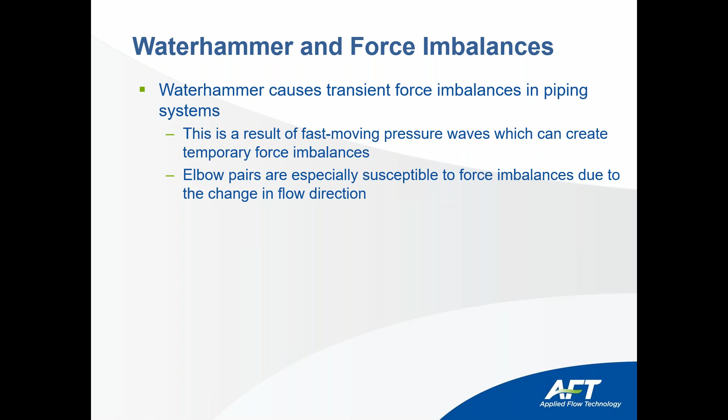Waterhammer is a sufficiently complicated process such that modeling software is usually required. Hand calculations sometimes are not accurate enough, so we require the use of software, and we'll be showing you that in this presentation. Typically, the issue of primary interest to the engineering analyst is understanding the transient pressure extremes, because this allows the selection of pipe strength and design for equipment protection and generally safety mechanisms.

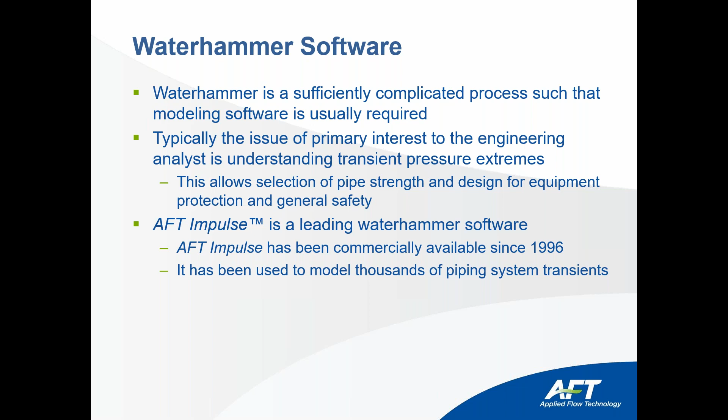So let's start. Once you calculate the overpressure, what should the designer do with this value? Well, the answer to this question depends on the code that you're using. If you're using B31.4, pipeline transportation systems for liquid hydrocarbons and other liquids, B31.4 refers directly to the maximum value of the overpressure, establishing a limit of 10% above the design pressure.

Now, if you're using B31.3, it's a different story because B31.3 doesn't refer directly to a maximum overpressure value. It refers to a stress. So the maximum stress produced by the loads created by the surge pressure shall not exceed 1.33 SH, where SH is the allowable stress for the operating temperature.

So what is the traditional way of calculating the force imbalance? Generally, the force uses only pressures. Here we have a case of two elbows, and we're closing a valve. The flow direction is in this sense. So we're totally closing a valve right here. This generates an overpressure in this section that travels back and sees this first elbow at the beginning, and the other elbow on the other side has a static pressure.

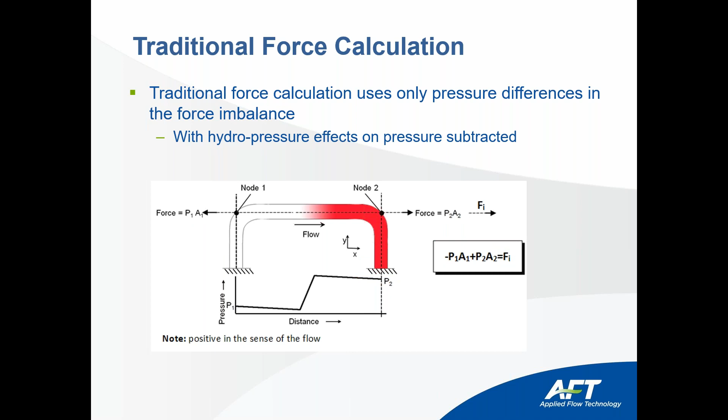This works best when flow stops quickly with no inline components, and the equation used is: the pressure difference is equal to rho times C times delta V, where C is the wave speed, also known as celerity. In most equations it is referred to as A, which is synonymous with C.

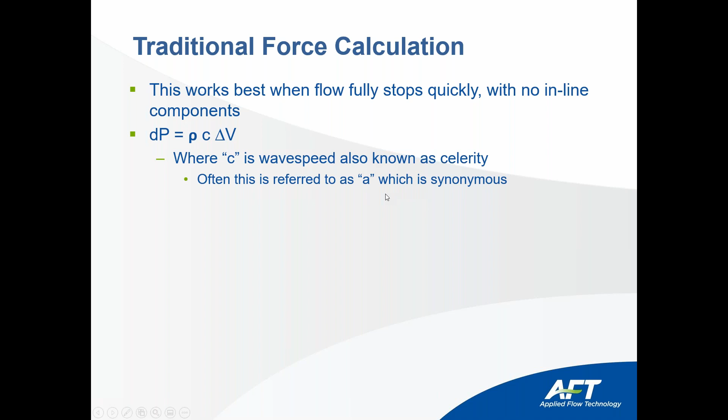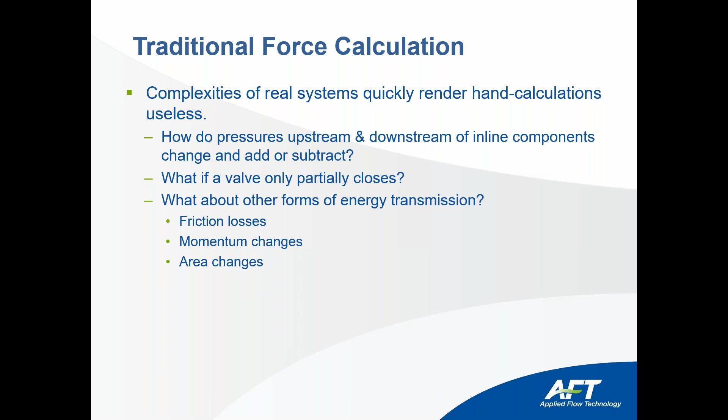Now, the complexity of real systems quickly renders hand calculations useless. How do pressures upstream and downstream of inline components change and add or subtract? What if the valve is only partially closed? What about other forms of energy that are not considered, like friction losses, momentum changes, and area changes?

Let's see an example here that we're going to talk about, and we'll use it as a model to see how we export forces for pipe stress. We have a tank here, tank A, that is transferring fluid to another tank, and we're going to partially close a valve right here. We're going to partially close it 90% in 0.5 seconds.

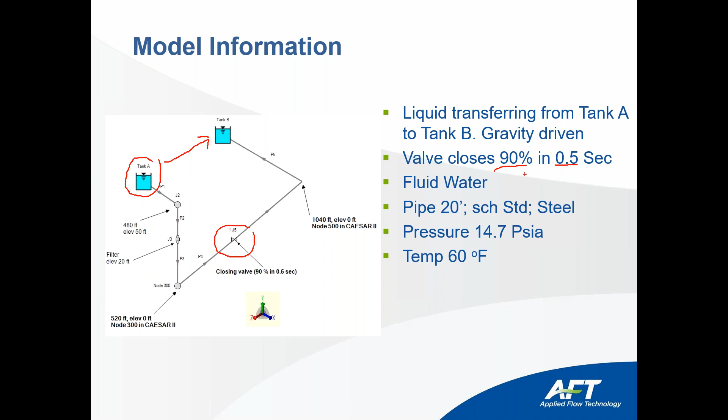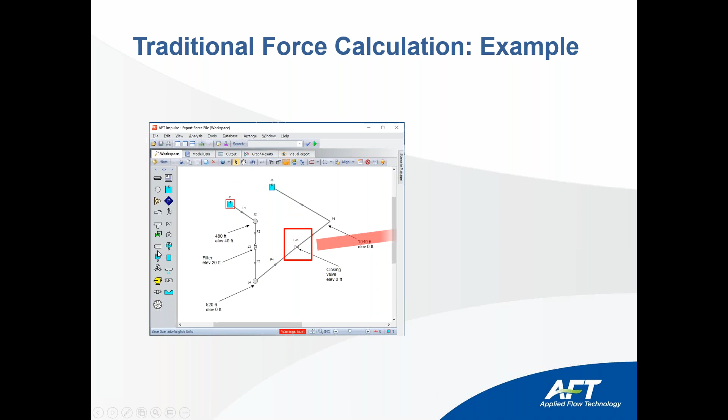So here we have our system modeled in AFT Impulse. We're closing the valve, and as you can see, we're not totally closing it. We're closing it 90% in 0.5 seconds.

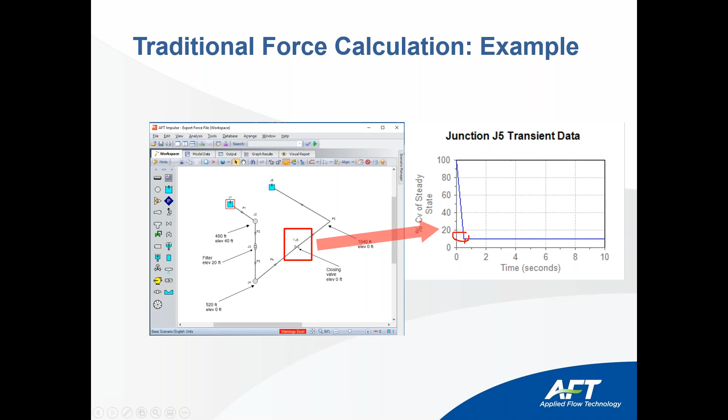When the valve fully closes quickly, the magnitude of the resulting pressure rise can be conservatively estimated using the equation force is equal to rho times C times delta V times A. This is also called the Joukowsky equation. But what happens if we close the valve 90%? Well, one could assume that the pressure rise would be 90% of the magnitude from the equation. Well, it turns out this is incorrect, as shown in the calculation below.

So here we have calculations, the values of C, rho times delta V times gc times area. So if we use the traditional equation, we would get 150,000 pounds. And AFT Impulse, considering all the inline components, pressure and the complex equation, we get 16,000 pounds, which is much lower than what the Joukowsky equation calculates.

So without a good ballpark pressure rise value, the manual method is not reliable. How do we apply pressure to a partially closed valve? At this point, we understand that if we want to do surge pressure calculations, we will need to rely on computer-based transient hydraulic analysis software to get reliable data.

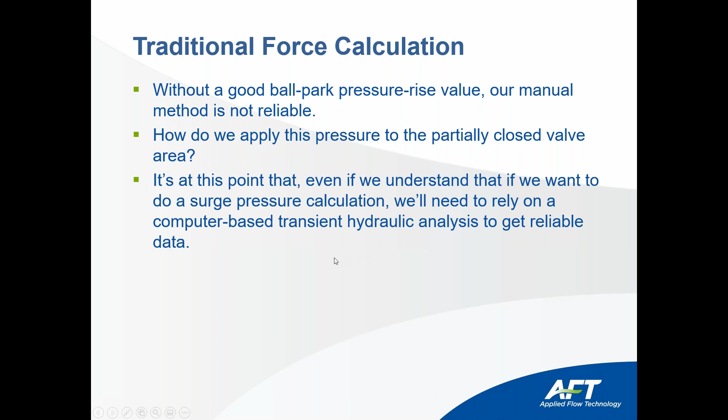So what else? What if we include momentum and friction losses? So now the equation is much more complex because we have to consider the momentum and the pressure on this side, the momentum and the pressure on this side, and the imbalanced forces created in the inline components. So the conservation of momentum tells us that the total sum of the friction forces plus the pressure times the area in both bends is equal to the momentum in each side of the equation.

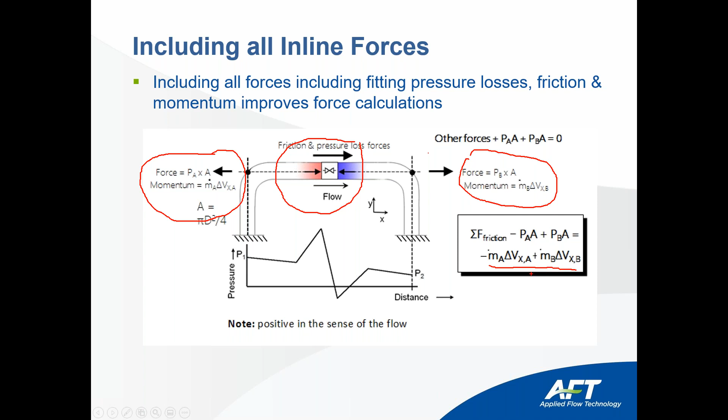When we use a traditional way of calculating forces, we would get an imbalanced force that is not equal to 0. And we know that in steady state, the forces should be balanced. So this is incorrect. The force should start from 0. Now, if we use all the inline components to accurately calculate the forces, then we would see that at time 0, we would get 0 forces in the steady state, and then the unbalanced forces start to travel in the system.

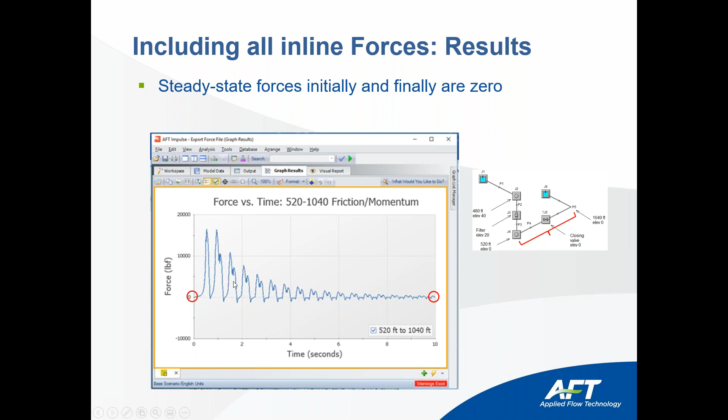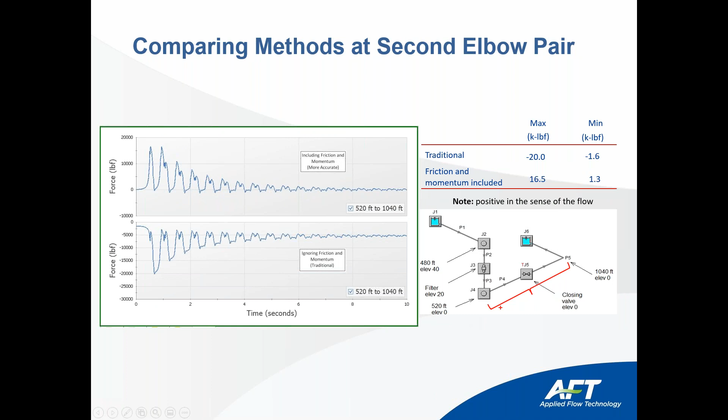So let's see the same calculations on the horizontal section of the model. Here's the horizontal section. So the traditional way of calculating forces will give us minus 20,000 pounds, while considering all the inline components and friction and momentum, we would get 16.5 as a maximum pressure. And the minimum pressure for the traditional way of calculating forces would be minus 1.6. And considering momentum and all the friction losses, it would be 1.3.

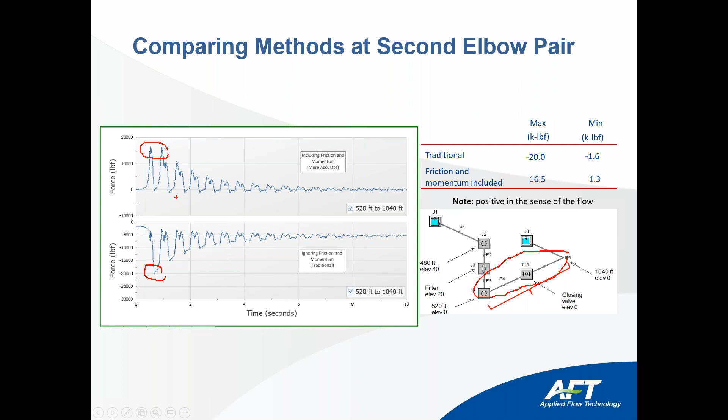So what do we conclude with this? The use of traditional force imbalance calculation methods can be highly inaccurate because they do not consider actual load magnitudes. Direction of maximum loads can also be incorrect, as we saw in the graph. They don't know the timing of the loads, and ignore some loads like the internal loads in the inline components.

Okay, so now what are the three methods that are commonly used to calculate the stresses? Static equivalent, which we will not be talking about in this webinar, spectral analysis and time history analysis. So let's start with spectral analysis.

First, we have to generate the DLF curves from AFT Impulse. So we go to File, Export Forces, and we go to CAESAR. Our newest version, as you will see when I show you, has other programs as well.

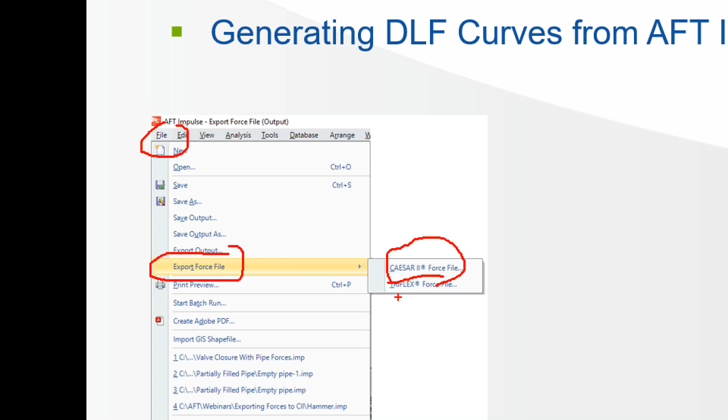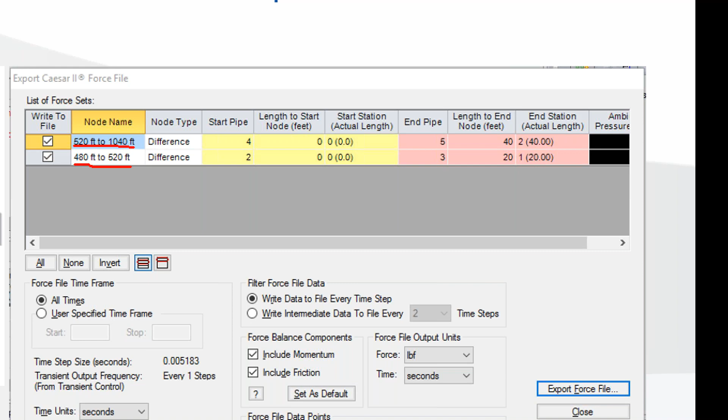And once we do that, it asks us, what are we going to export? So here, we create the set of forces that we're going to export. Here would be the horizontal section of the model, and this would be the vertical section of the model. So we're ready to export to CAESAR II.

As I said, we should include momentum and include friction to be more accurate in the way we calculate it. So we added in the checkbox. The newest version does this, but it includes all the forces, friction and momentum by default.

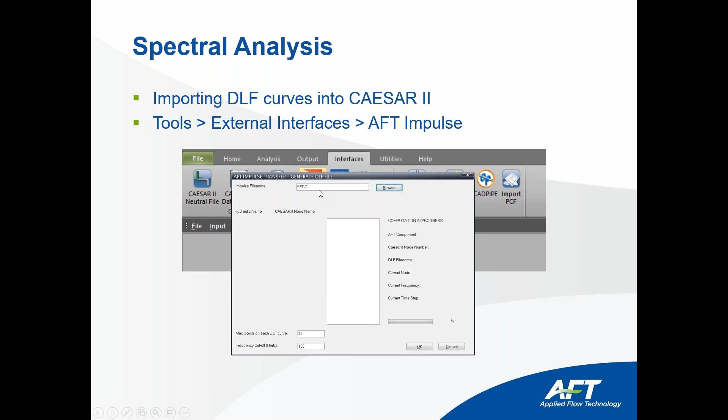So now we import the curves into Caesar 2. We go to Tools, External Interfaces, and we select AFT Impulse. Caesar 2 has a connection with AFT Impulse directly. So once we select AFT Impulse, it brings us this screen. So now we're going to import the DLF curves that we generated in AFT Impulse.

Here are the two DLF curves that we generated in AFT Impulse, and we assign the nodes where they're going to be applied. Once we do that, Caesar gives us a message saying that all the forces are in the global X, and this should be corrected when the dynamic analysis is performed. And we'll see how we do that.

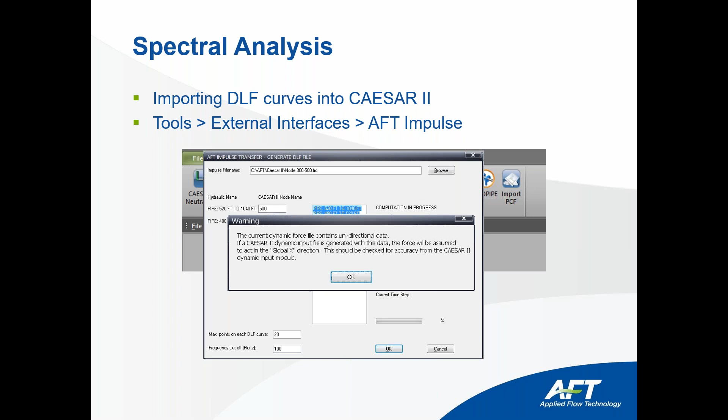The newest version, as I'll show you later, allows a user to include the unit vector. So now this message is not going to be sent anymore, because Caesar will consider the direction of the forces already, because it's inputted by the user.

So now, what is the next step in Caesar? We open the dynamic input, and the input is almost completed, generated by Caesar itself with the interface with AFT Impulse. Spectrums have been defined, force sets and cases have been created. Force direction needs to be defined, as I said, in the force set and the load cases.

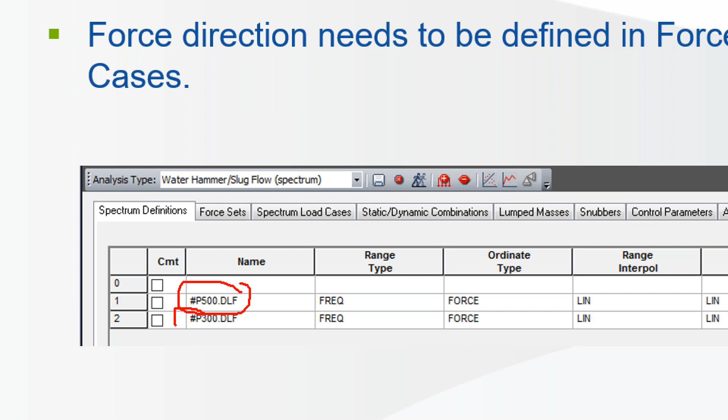So now we have the force set, the DLF curve that's going to be applied. It's important to put the DLF name and the node where it's going to be applied. So here it's going to be applied in node 500, and here it's going to be applied in node 300.

So now we go to the force sets. The force sets have been created for you. We have two force sets, and the reason why we have two force sets is because in the spectral analysis, force sets are applied independently. And the only correction you have to make is change the direction of the forces. So now this would be the horizontal force, and this would be the vertical force in the section of the pipe.

So you have to do the same for the load cases. In the load cases, you have to change the directions. As I said, spectral analysis applies the spectrums independently. So it created two load cases for you. And now you have to change the direction for each one.

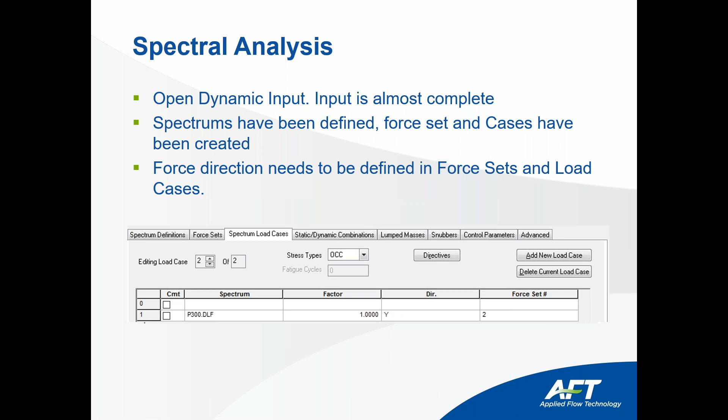So this one would be the horizontal section, because node 500 is in the horizontal section in Caesar 2. And then we go to the other case, and this is the vertical section. It's applied in the Y direction.

Static/dynamic combinations for stress have been created for you. Since forces are applied independently, two cases are created. Here's the combination. So here's the dynamic load case combined with the static case. As you know, B31.3 asks you to combine the static case with the dynamic case to calculate the resultant force. And here's dynamic case 2 added to the sustained case for the two events to be analyzed.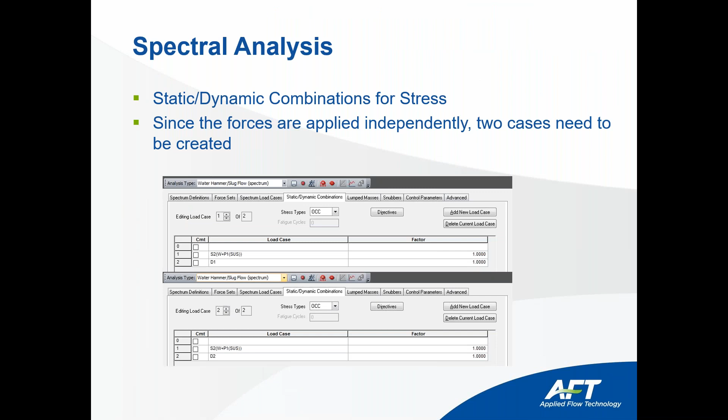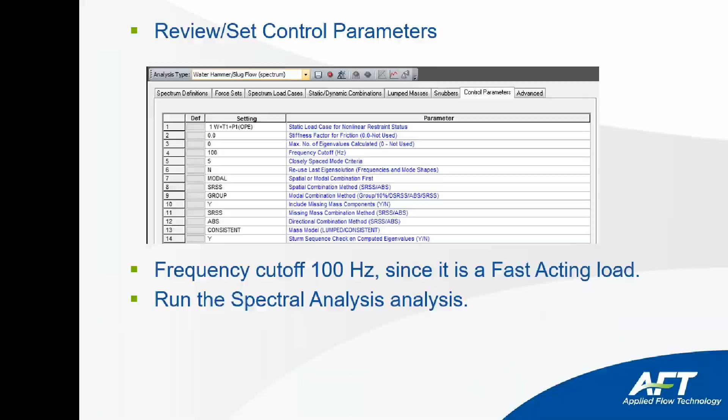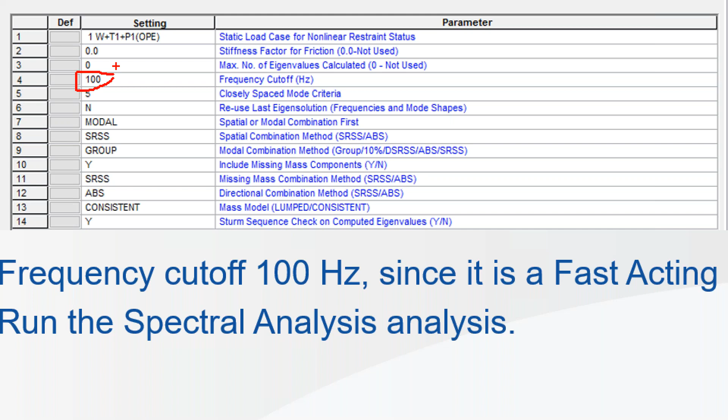So we're almost ready. One last step that we have to perform: we have to review the control parameters. Generally, by default, Caesar 2 comes with 33 Hertz. Since it's a fast-acting load, we should increase this number to 100, since the low frequency modes below 100 require low energy to be activated. So we set a cutoff frequency of 100 to consider the low energy modes that will be excited by a fast-acting load.

So once we do this, we're ready to run the spectral analysis. And if we run it, we'll get that the system failed by 22%. Before I move on, I'm going to bring up AFT Impulse and follow the steps that you have to do to generate the forces.

So first, you go to Analysis, you go to Transient Control, you go to Force Output, and you say which sections you're going to create. Like this would be the horizontal section. This would be the vertical section where you're going to calculate the forces.

And as I said, in the latest version, Impulse 8, which is going to be released in one month, you can now input the unit vectors. And Caesar, which we developed with the people from Intergraph, will receive the coordinates and the unit vectors. So that way, Caesar will know in what directions the forces are being applied.

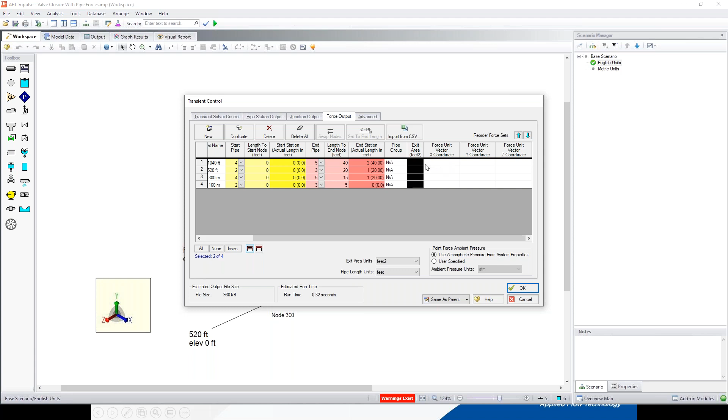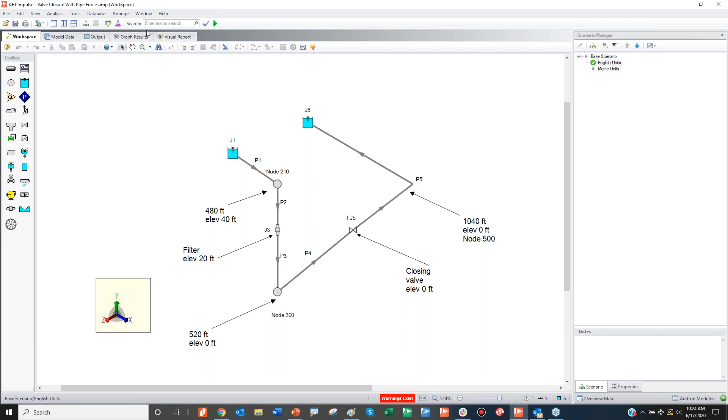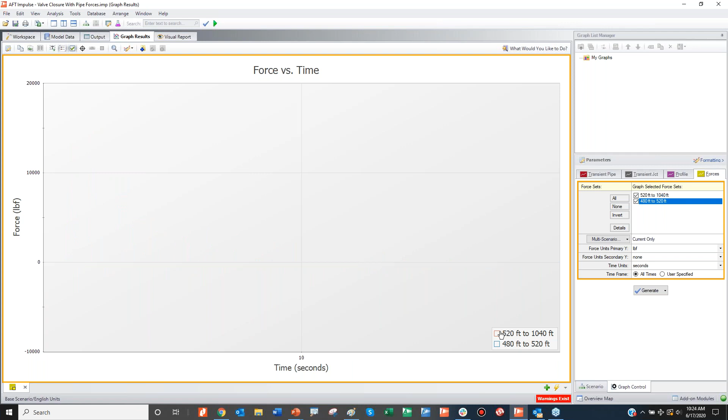So now, once you do that, then you run the program, and you would get in the graph the forces generated. So here it would be in the horizontal. This would be in the horizontal section, the forces, and this would be in the vertical. So once you generate the forces, you're ready to export it.

To export it, you come here and file. You come to export files, and as you can see, in the latest version of the software that's going to be released in Impulse 8, we have Caesar, Triflex that was in the old version. Now we have ROHR2 for the German market, and we have AutoPIPE. AutoPIPE has been added, and it's ready to receive the forces generated by Impulse.

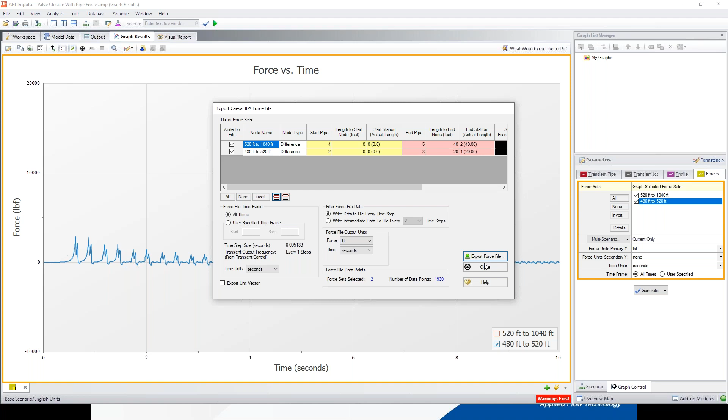So once you do that, you select the program where you're going to export it to. And you select all the components. Like, because I'm going to do a spectral analysis, I want to export the horizontal and the vertical spectrum to Caesar. If I try to export it, it will ask me to set it in seconds. And we're ready to export to create the file. Okay. So this would be the spectral analysis.

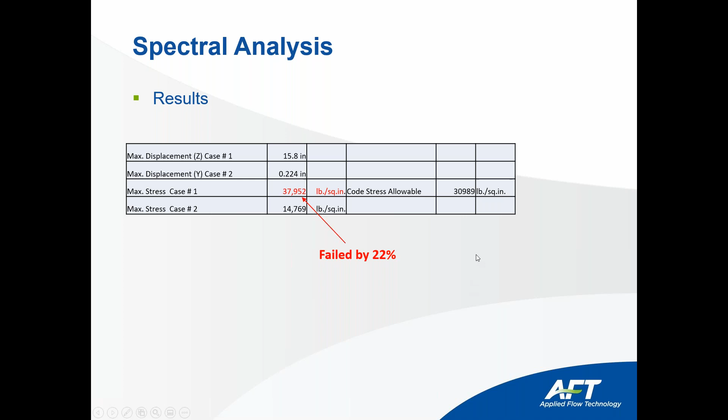Now let's go for time history analysis. The input required by time history analysis is almost exactly the same as spectral analysis. Both require the same force magnitude, direction, and location. Both will incorporate the same force time data. The fundamental difference is that in time history analysis, the force time data is applied directly to the model, and the response is evaluated in incremental steps in time.

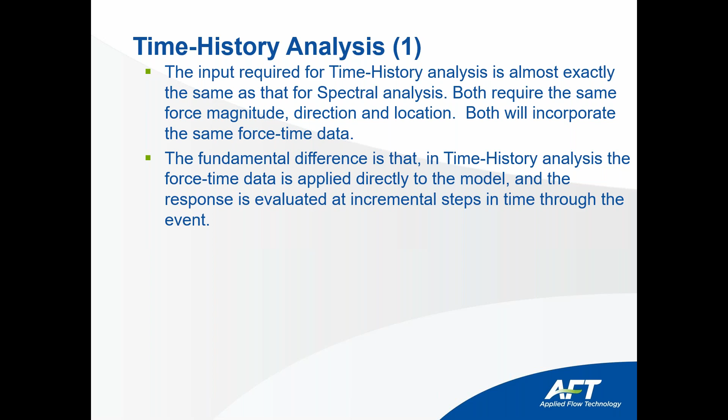So basically, what time history analysis does is it models the force really as it's traveling down the pipe, as a difference from spectral analysis that applies it independently to each node. Spectral analysis instead converts the force time data into a maximum response curve that is matched to the natural frequency of the piping system, and sees how much each mode contributes to the total displacement. Unlike spectral analysis, time history analysis considers the timing of the events and considers the kinetic energy of the system in motion during the event.

As I said, time history analysis is much more real because it models the wave traveling down the piping system as it happens, and it's not a mathematical approximation. Don't take me wrong, spectral analysis can also be a useful tool. So it is up to the designer whether to use time history analysis or spectral analysis. Time history analysis is not automatically created for us in Caesar II, so we have to manually input more of the data to perform this analysis. Time history analysis requires milliseconds, as a difference from spectral analysis that requires seconds, when importing AFT Impulse data.

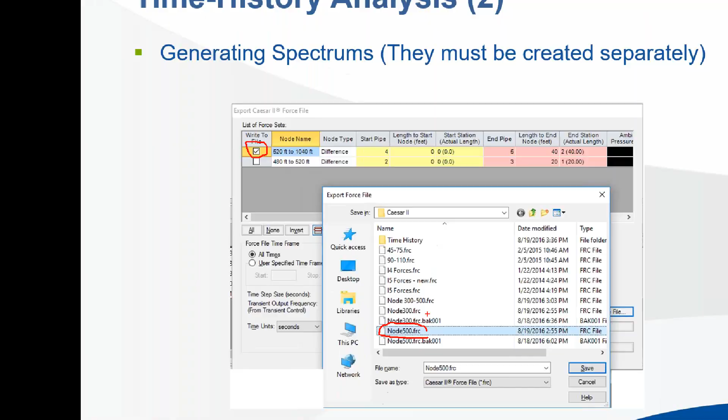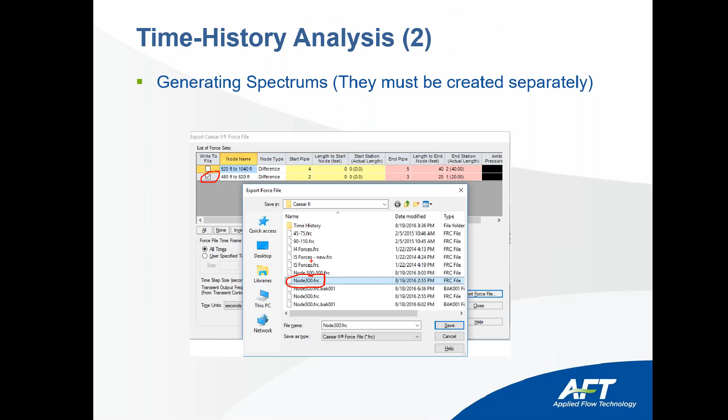So when we generate the spectrums, since they're going to be applied in each one of the sections, they must be created independently. So when we go to Impulse, we select first the horizontal, and we create the spectra that's going to be applied in node 500. And then we create the vertical section. We select the vertical section that is going to be applied in node 300. As I said, it is convenient for the analysts to name the spectrum on the node that it's going to be applied in the pipe stress program. So once we do that, we are ready to go to Caesar II.

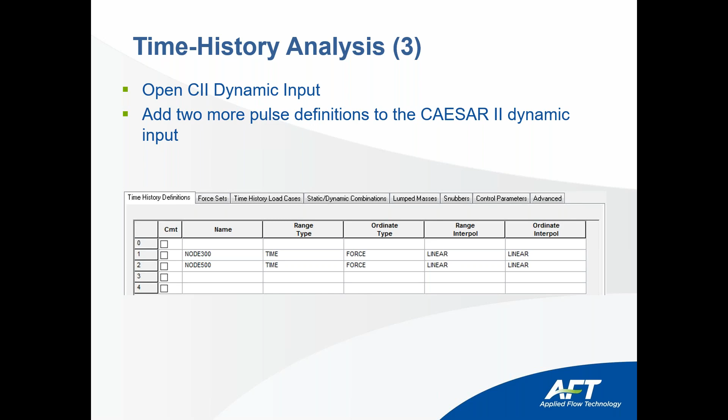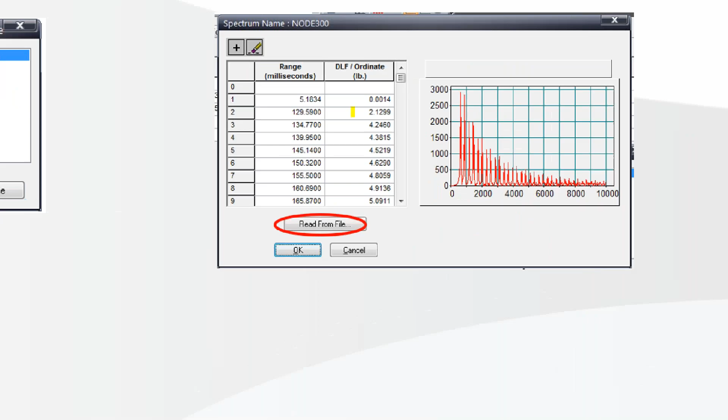So we open dynamic input. We add more pulse definitions to dynamic input. So now here we create, we give it the same name that Impulse generated. So here we have pulse node 300 and node 500. The next step is to import the data from what was created from Impulse. So now we select the spectrum name 300. First, we're going to import the vertical. We read from a file, the one that was generated, and Caesar II will import the data directly from Impulse, and will create this graph for us.

So now the next step is to generate the node 500 application. So now it will read from a file, and Caesar II will import this graph, which is the force graph. As you can see, this is not an approximation. The magnitude of the force is also imported. So this is one of the things, we don't have to put the magnitude, because all the magnitudes are directly imported from the file generated by Impulse.

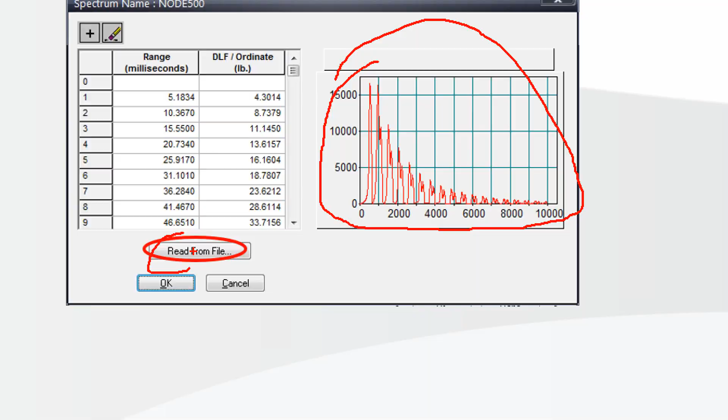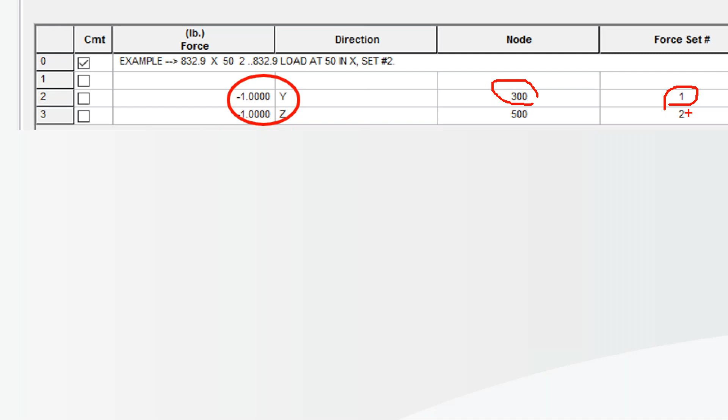So now the next step is to define the forces, location and direction. Magnitude is already defined when the data is imported. So now we don't put the magnitude, only the direction of the force. In this case, it's minus and minus. The node that it's going to be applied to, and the force set that it belongs to. This would be force set 1, and this would be force set 2.

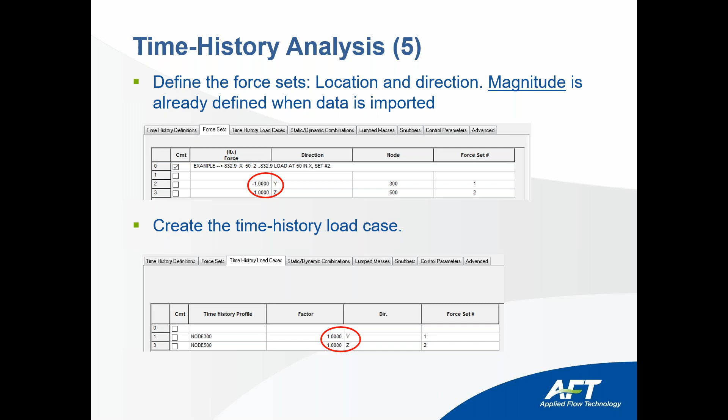We create a time history load case. So here we go to load case, and we set the direction of the forces. So the load cases that we're going to study are 2, because they're applied independently to each node, 300 and 500. And now the next step is to create a dynamic case.

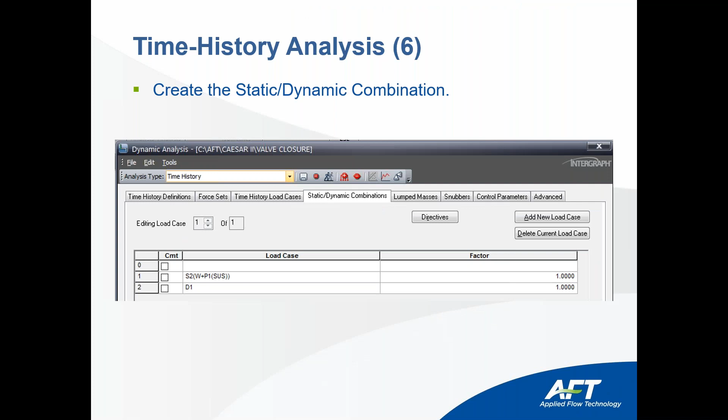Since it's a combination, we only need to create one dynamic case. That would be dynamic case 1, combined with the static case that we're going to analyze it against. So we have the dynamic case load 1 combined with the static case for the stress analysis, factor of 1. And finally, we use the control parameters.

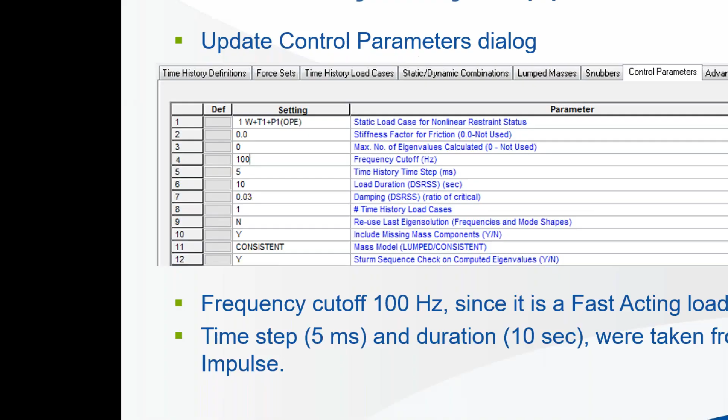The same as spectrum, we put the cutoff frequency 100 because it's a fast acting load, and all the loads below 100 hertz need low energy to be excited, so all of them will participate. So we change it to 100 hertz, the cutoff frequency, and the time step 5 milliseconds and duration of 10 seconds. That would be right here. 5 milliseconds the time step, and duration 10 seconds, because that is the total data that is imported from Impulse.

And where do we get this number from? Okay, let me bring Impulse. Give me 1 second.

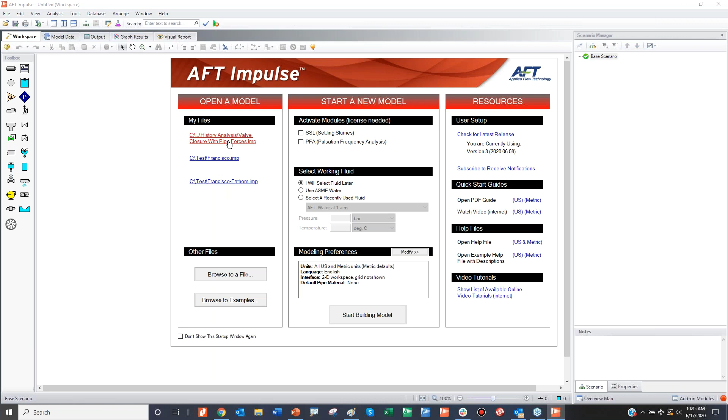So this is Impulse 8. So we'll bring the file that we've been using. So the 5 milliseconds, to see it, this is the one, transient control. Go to force transient control. So the 5 milliseconds will come from this number here. This is not necessarily what you have to use, but it's a suggestion I give. And the 10 seconds is the total simulation time that we're using.

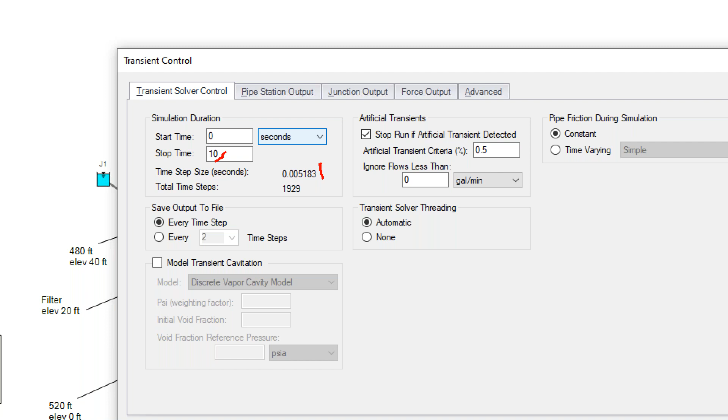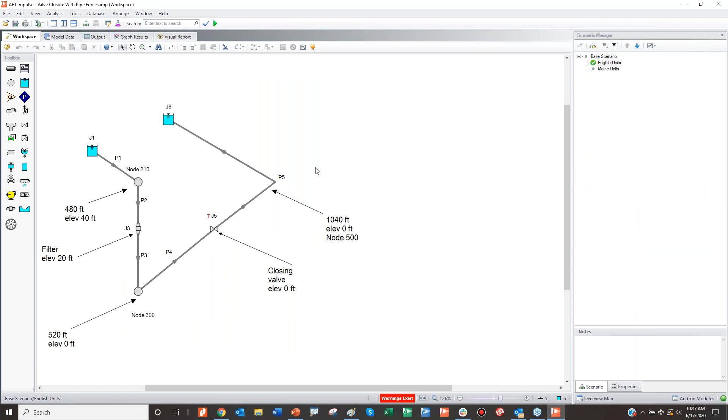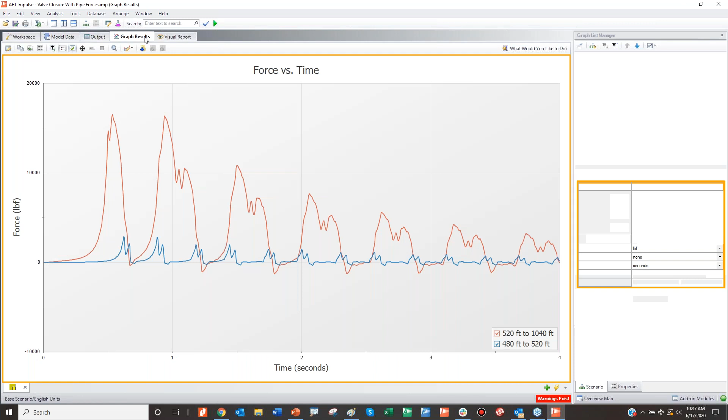So what we can see from here is that the wave travels and hits first the horizontal section of the pipe, and then it hits the vertical. And the reason for this is that we're closing the valve right here, so the horizontal sees the increase of pressure first, and then the vertical. And this is what history analysis tries to model, how the stresses change as the pressure wave travels. As a difference, when we do spectral analysis, it calculates stresses independently applied to each node.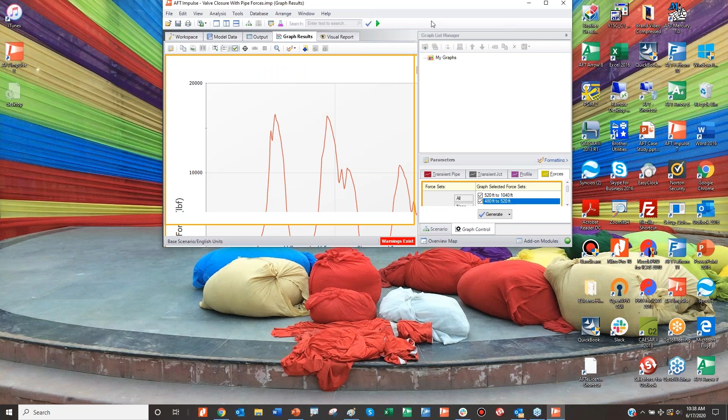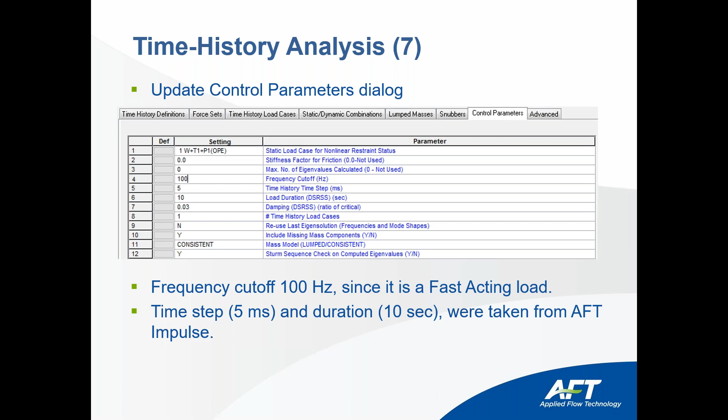So once we update the control parameters, we're ready to run the time history analysis, and we get that it failed by 18%, while in spectral analysis it failed by 22%. So that tells us that spectral analysis is more conservative than history analysis, and the reason for that is that history analysis is more real. It models the wave as it travels down the pipe, while spectral analysis analyzes each spectrum independently.

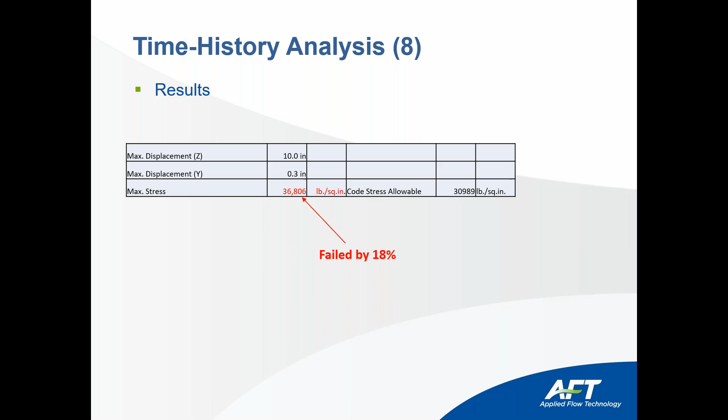So how do we prevent this failure? Well, the first thing that we should try to do is to slow the valve closing to a minimum of 1 second instead of 0.5 seconds. If we do that, then we would get a resultant stress of 30,000, which is below the 30,900 in the pipe stress code. So that would give us allowable.

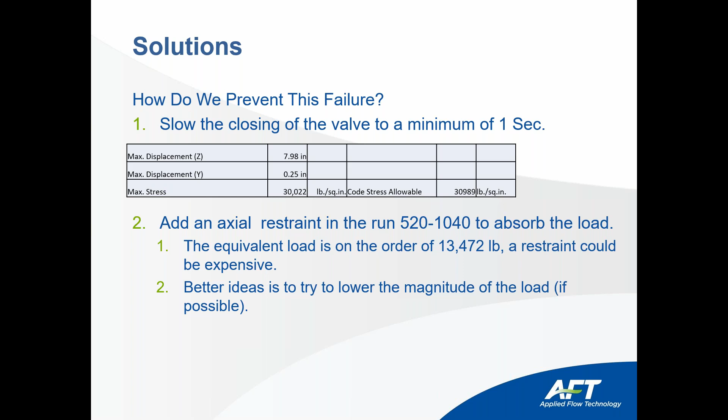Another solution would be to add an axial restraint to the horizontal to absorb the load. But the problem with that would be that the equivalent load that the axial restraint would have to handle is 13,000 pounds. And in my experience, above 5,000 pounds is a load difficult to handle for supports. So 13,000 would require a special support that could be more expensive. So a better idea is to try to lower the magnitude of load if possible.

So what are the conclusions? It is important to model waterhammer events for proper system design and operation. AFT Impulse can generate transient forces that can be easily imported to CAESAR II to do either spectrum or history analysis. Traditional force estimation techniques, which rely on pressure difference, can be highly inaccurate. The manual method using the Joukowsky equation can be conservative, especially with partially closing valve events.

Partial closure of the valve can also cause failure if not done properly. We saw that we partially closed 90% in 0.5 seconds. So that can create a failure, and it's more appropriate if we close it in 1 second. Spectral analysis can be conservative compared to history analysis.

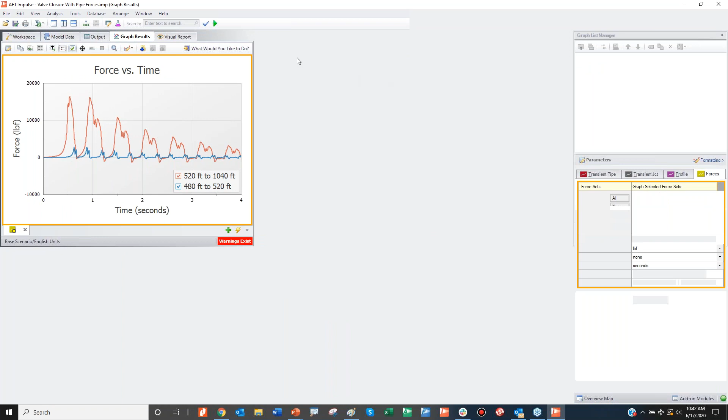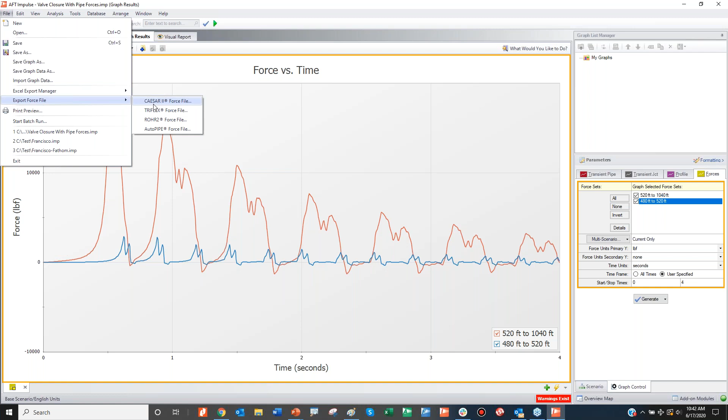Okay, what about the third direction? As I said, our latest software will allow the multi-direction analysis in transient control. When you export the forces, you will have the three-dimensional directions, X, Y, and Z. So the three directions are considered in the force.

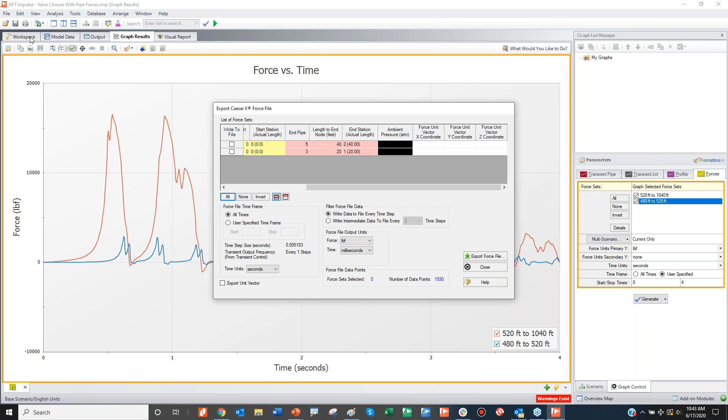If the bend is considered in both pipe segments, where is the direction change in the bend, and is it considered only in one pipe and one segment? Okay.

When you select the analysis for the forces, you have the force output. You have several options to calculate them. If you're going to calculate like two bends, you can use difference, or difference between three sections, or you can use point. So if you have intermediate bends or whatever, you can just tell the software to calculate for the intermediate sections, telling where exactly the bend is located.

So you can create different spectrum for different bends in each section using the point difference and apply it to the sections. Like I would select point, and you can calculate the force in each bend independently. If you have a pipe with two bends, then you can calculate the forces and say, okay, it starts in pipe 4. And here, in this case, we have pipe 4 and pipe 5, right?

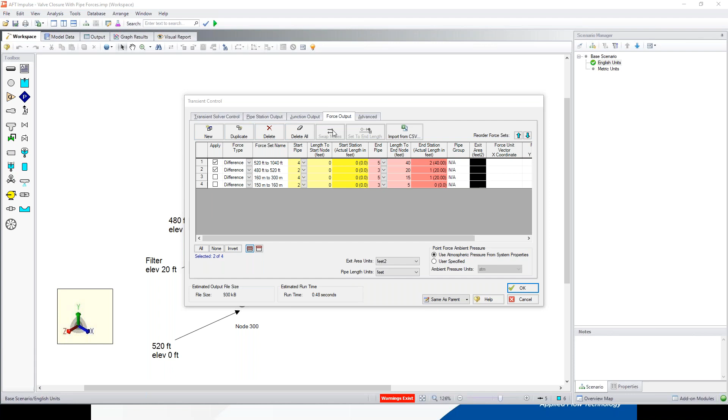Pipe forces. So here we tell it to calculate the difference forces between pipe 4 and pipe 5, and the bend in pipe 5 is located at 40 feet, which is right in the middle of pipe 5. So here I would be telling the software

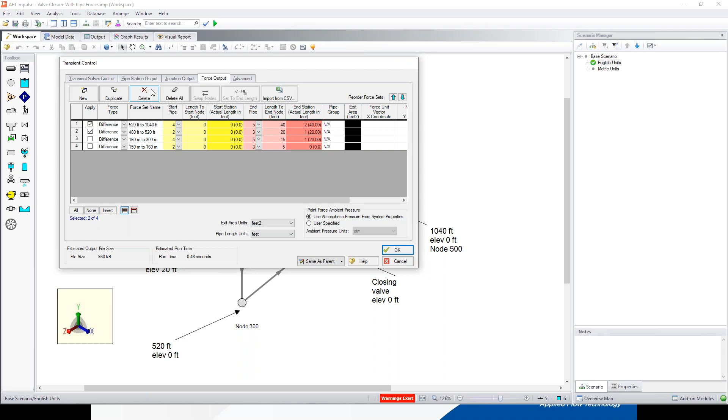to calculate the forces between this node here and in pipe 5, the difference forces in the bend located in the middle of pipe 5. You can also, if you have an intermediate bend here, say, okay, I want the difference forces between. You can also do it by point, but the beauty of AFT Impulse is it calculates the difference between the two elbows, considering all the intermediate forces for the inline components.

Okay, for larger systems, there are many pairs of ends and force sets to be imported to Caesar II. What is the limit of the large data input to Caesar II? Well, this depends on the type of analysis you're going to do. If you're going to do spectrum or history, Caesar has a data limit when you export it. If you're going to do a history analysis, I haven't found any limit, but if you're going to do a spectral analysis, export to Caesar II.

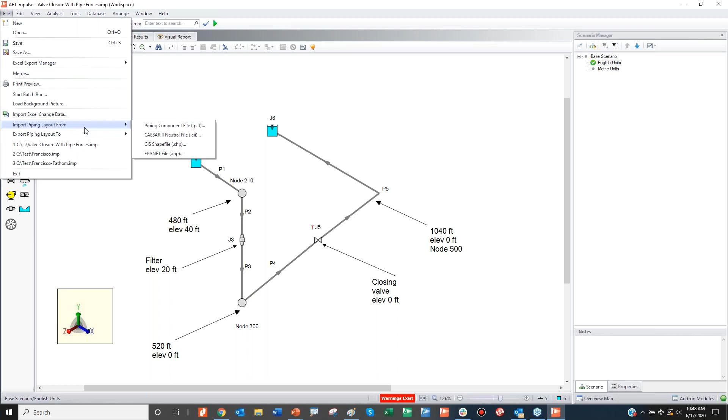Let me run it. Caesar II has a limit. Okay. The program will check for you if Caesar can receive the data. As long as it is in blue, it's okay for Caesar to receive it. If not, you don't have to export all the data. You can limit the time. Like here, we're exporting 10 seconds.

Really, you don't need to export all 10 seconds of the simulation. You can limit the time you're going to export to Caesar to 5 seconds. And as you can see, the size of the file that's going to be exported is reduced by half. That way, it's easier for Caesar to handle it. As long as it's in blue, Caesar will be able to receive it. When it's in red, you can change the time, the amount of data you export, and adjust it to the size that Caesar II can receive.

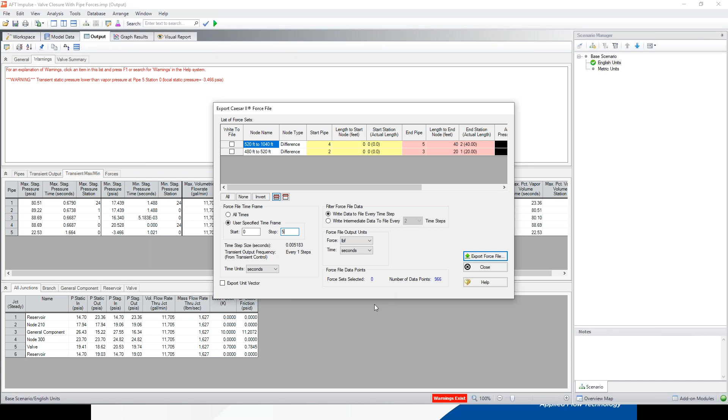Can the stress be reduced by increasing the distance between elbows and valves? Really not, because of the pressure imbalances. As a matter of fact, if you increase the distance between the elbows, the imbalance force will last longer. Very short sections between elbows last less, and the stress created and modes excited are less. So really a solution is not to increase the distance between elbows.

Let me see. Trying to increase the size of this.